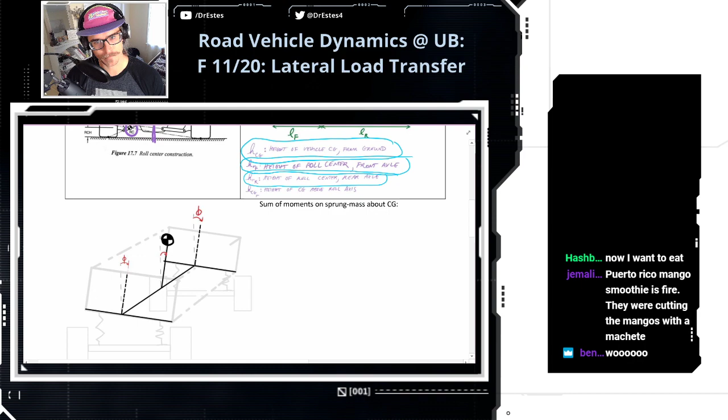Okay, let's recap what's going on here. When you corner in a car, the weight shifts to the outside tires. And when you shift weight, it actually makes the tires at a given axle less grippy in a way. The outside tire, where most of the load goes, gets more grip. But the inside tire that lost normal load lost grip. The net effect is that there's less grip overall at that axle.

So we're trying to reduce the amount of load transfer that happens when racing, because we want the maximum grip. There's a couple things you can do. Number one, you can increase the track width: if you widen the distance between your tires, less load transfer happens. If you bring your CG really low, less load transfer happens. And if you reduce the mass of your car, there's less load to transfer in the first place.

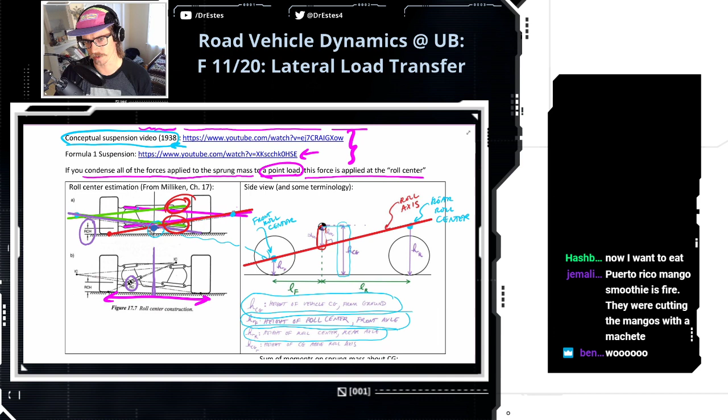And we're going to be using this figure here, this beautiful rendition, to talk about this. So let's just start working on this. We're looking at the car from the front. This is the front, and let's say we're cornering to the driver's right. So actually that'll look to the left for us, but it's to the driver's right. If I'm going to the right, which tire is this? This is the right front tire.

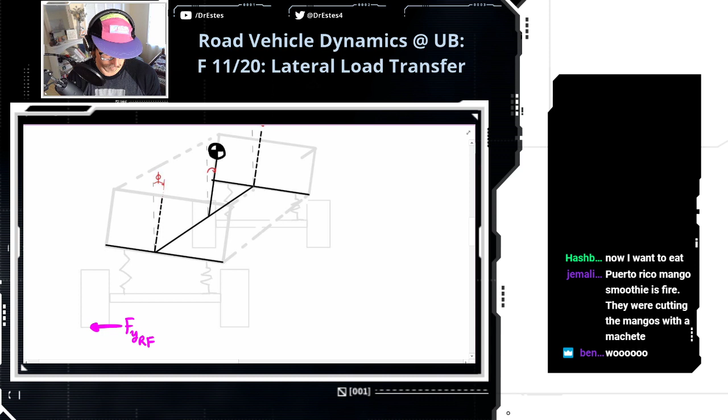So that's the notation I'm going to use. So if I'm cornering right, this is the left front tire. The friction from the road and tire interface creates a force on the tire in that direction. Now, we talked about the roll center earlier. The significance of the roll center is that we have this force generated at the ground, and it's going to transmit through my tire, through the structural elements of the suspension, and eventually transmit a load to your sprung mass. So up here, the mass above the suspension, that's our sprung mass.

Now the significance of the roll center is that theoretically, if I could take the forces from the tires and put them at one point on the sprung mass, it'll happen at the roll center. So I'm going to put Fy at the front. It's going to go right there. That's combining the left front lateral force and the right front lateral force. If we combine it to one point, it's going to be combined at the roll center.

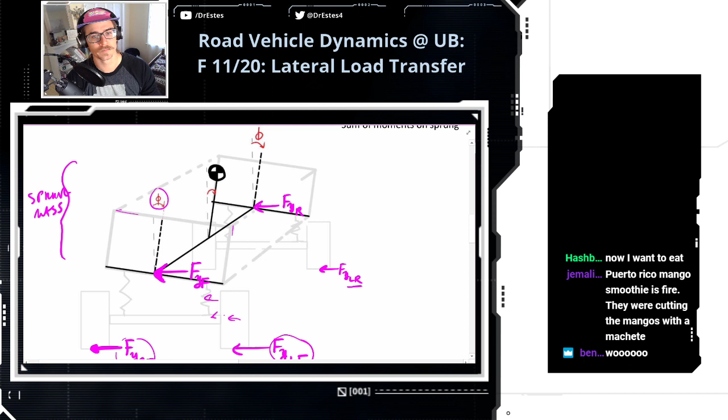So we're cornering to the right. And notice the body of the car is going to roll to the outside tires, an angle phi, which is what we're showing right here. So it makes sense, these outer tires are feeling a little bit more load from that. Okay, so I want to start talking about the suspension springs a little bit. And to do this, I think I want to make some room. Can I zoom in more? I'll just write that a little smaller here.

All right, let's draw a horizontal line that represents before the car rolls. If the chassis didn't roll, it would just be upright like this, right? So this angle phi, that body roll angle, is also going to be in here. So that's what that angle is. And we can think about what the springs looked like before the body rolled. Both of them were just kind of like this. But now that there was roll, this spring over here got compressed that amount. And this spring over here got stretched this amount.

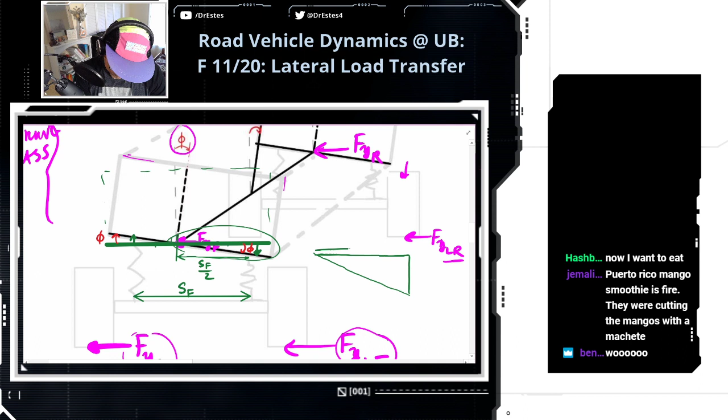So what I want to do, I want to zoom in on this triangle here. And I'll exaggerate this roll angle a little bit. Okay, so this top length from here to here, this is going to be that distance between those suspension springs divided by 2. The angle in here, that's the roll angle of the sprung mass.

And this distance here, I'm going to call it delta Z. And that's the distance that this spring, this is the left front tire, that's the distance that spring was compressed. So what I want to do, I want to find a relationship between delta Z and this roll angle. So we can do that really quick.

So I know that the tangent of this roll angle is equal to the length of the opposite side, delta Z, divided by this adjacent side, which is that distance between the springs divided by 2. Actually, let's just solve for this. Okay, so delta Z is equal to SF over 2 times the tangent of that angle. If you assume that the roll angle is small, then tangent of phi is approximately equal to phi itself.

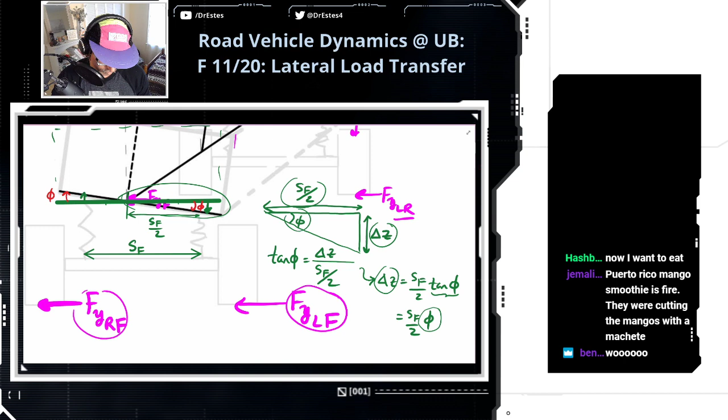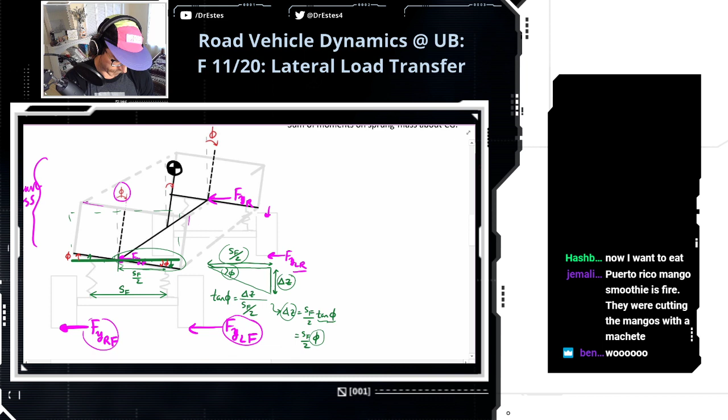Okay, let's see if I'm missing anything here. What I want to do, I want to do a sum of moments acting on the CG. So the forces that are going to produce moments, we have the front lateral tire force acting at the front roll center. We have the rear lateral tire force acting at the rear roll center. But we also have a moment that's produced by these springs.

And so the spring force, let's see. If I compress this spring an amount delta Z, the force from the spring by Hooke's law is going to be the stiffness of the spring, usually we use K, and let's say this is the stiffness of a suspension spring at the front, times delta Z. So this spring, when I roll this way, it's going to produce an upward force on the chassis, which is equal to that stiffness times how much you compress the spring. That's just how a spring works.

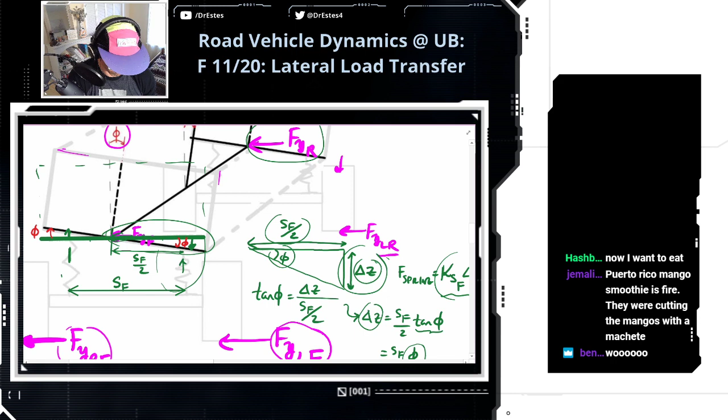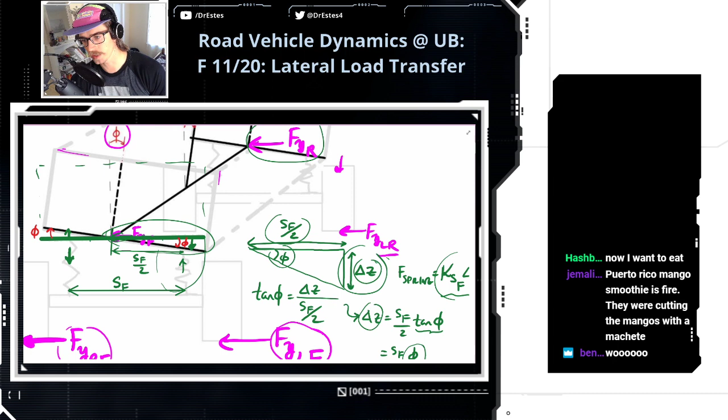Same thing here. Oh, wait. On this side, this spring is getting stretched. And so it's actually going to produce the same magnitude of force, but in the opposite direction. So these springs are trying to resist any rolling. Makes sense. All right. So let's start to do the sum of moments on the sprung mass, or rather, sum of moments about the CG.

Now, there's moments generated in a couple directions. We know there's a moment about the vertical axis, so that's the yaw motion, and when we're doing steady state cornering, that moment should be balanced, and it depends on the proportion of front and rear lateral force. So if those moments are balanced, then we're not spinning out the car. So I'm not interested in that moment right now.

I'm going to talk about a moment about an axis that's parallel with the roll axis. So I'm going to do moments about the CG, and I'm going to be interested in the moments about this axis, because we got this side view up here. So we have the roll axis here, which connects the front and rear roll centers. That's how you define the roll axis. And then I'm making another axis here. So I'm going to sum the moments acting on the CG about this axis.

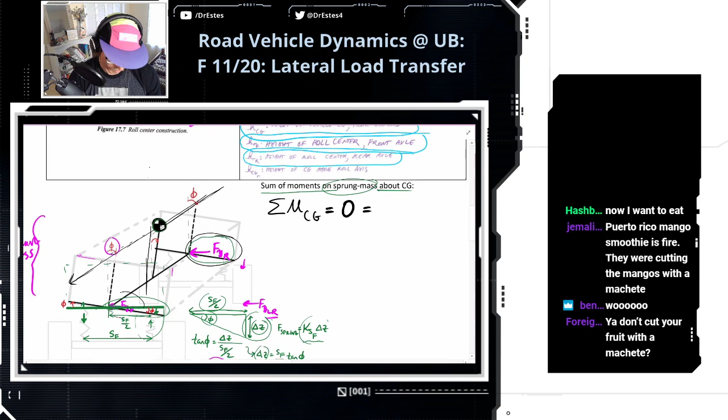Here we go. So let's assume the moments are balanced. We're going to be at steady state cornering. And we have a moment created by, let's see, I think this will be a negative moment. I have the combined lateral force from the front, the combined lateral force from the rear, and it's acting over a distance, the height of the CG above the roll center.

Foreign Wanderer says, you don't cut your fruit with a machete? I don't. I don't want to lose fingers, because I like to play instruments. So I'll just use a kitchen knife.

Okay, so you can see that this lateral force would kind of want to make the CG or the body roll this way. It's like I'm pushing the feet out from under it and it's going to tip over this way. But the suspension springs are going to resist that. Because this spring's pushing up, this spring's pulling down, and they're trying to make a moment that's fighting that.

Yeah, I use a katana instead.

Okay, so now we're going to add the moment that's resisting this moment from the lateral force. So let's first talk about the springs from the front. Maybe I'll use green here because I've been using green for those springs. So I'm going to have plus the spring stiffness at the front times the distance it's compressed. So that's the force from the spring. And then it's acting over a distance SF over 2.

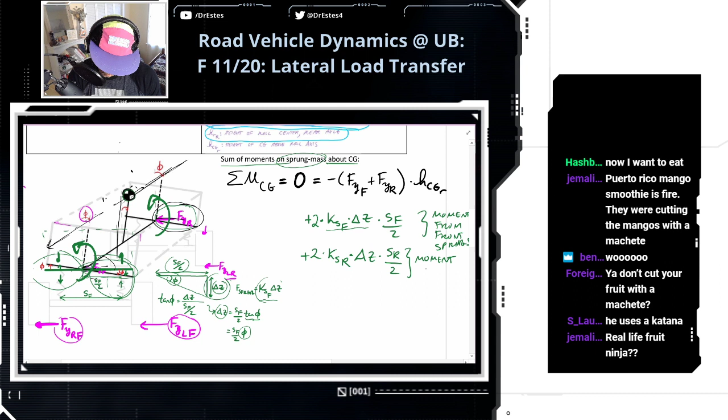Okay, so those are from the front springs. And then the same thing's going to happen at the rear. But potentially, you could have a different suspension stiffness at the rear. And you could have a different distance between their connection points. So this is the moment from the rear springs.

Okay. Now, the thing here that is important is that this deflection of the spring, the compression at the front and the rear, we're assuming it's the same. And that's based on the assumption that the roll angle is the same at the front and the rear. So we're assuming the chassis is rigid. It's rotating about this roll axis. And so that angle is going to be the same at the front and the rear. And because the angle is the same,

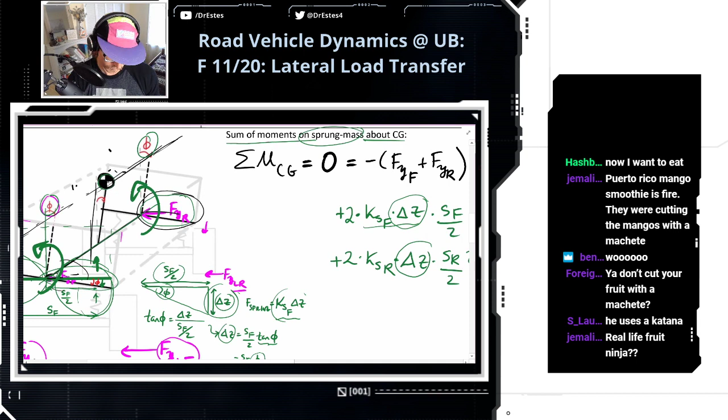this deflection, actually, doesn't the deflection depend on... No, the deflection isn't the same. It depends on how far away the spring is. Okay, so we should do that. The roll angle is the same, but that doesn't mean that the springs are compressed the same. All right, this should be rear. Because it depends on the spring attachment point.

Louis says, why times 2 at the front? Because this term only considers a spring on one side. I keep confusing myself. This is the left front side. So I was looking at the suspension regarding the left front tire, and that produces this term. But the contribution from the right front tire is going to give you the same term. So I'm just multiplying it by 2, so it's getting both sides of the car. Okay. Good.

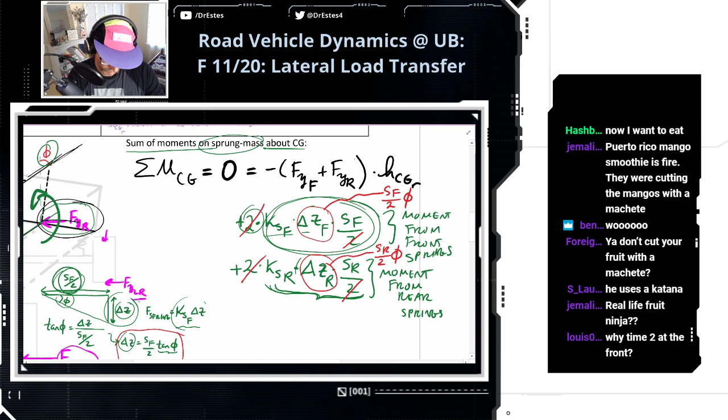Okay. So we'll continue with this. Before we move ahead, let's cancel out these 2's. There we go. And we know that the sum of the lateral forces should be equal to the mass of the car times its lateral acceleration. Okay, good. So here we go. Now we're going to say this is all equal to the negative of the mass times the lateral acceleration times the height of the CG above the roll center.

Cojul says, what's up, Dr. Estes? Just summing some moments, just using Newton's laws, that's all.

Okay. And then we're going to have from the front springs, K springs at the front times SF squared, because I'm going to have SF times SF, times the roll angle divided by 2. So that's the moment from the front springs. Let's add the moment from the rear springs: K spring R, SR squared phi over 2. All right.

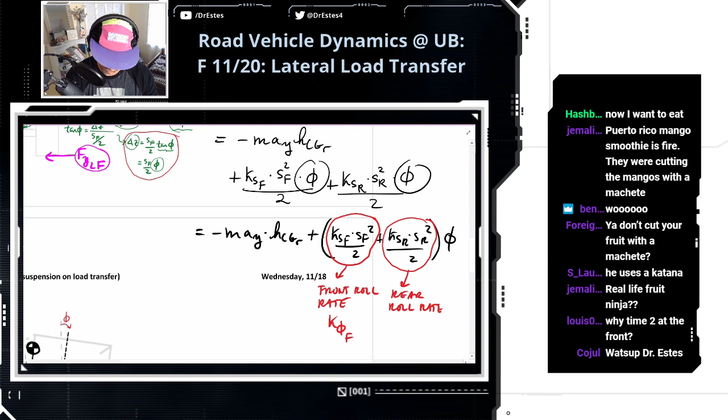Okay, here's the term. This right here is called the front roll rate. And the symbol for it is K phi F at the front. And it's kind of like a torsional spring constant for your front suspension. This one is the rear roll rate, K phi R.

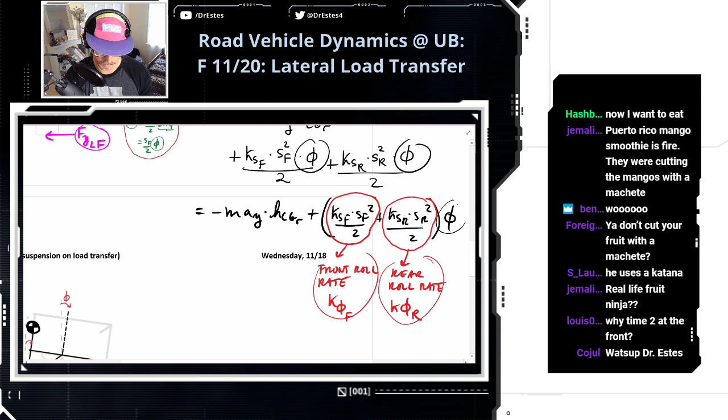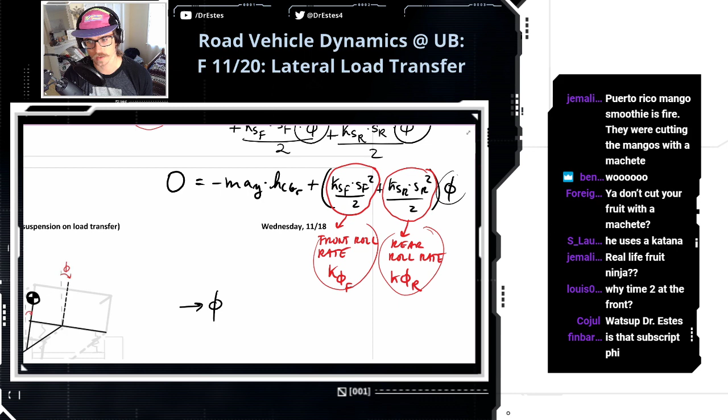All right. So we're going to be talking about tuning these terms. Okay, now I want to solve for this angle phi in terms of all the other stuff, because this is equal to 0 if the moments are balanced. So the roll angle of my car, is that subscript phi? Yes. Yeah, that's right. So I got K sub phi and then just F or R for the front or the rear.

Okay. So I got phi is the mass times the lateral acceleration times the height of the CG above the roll center divided by the sum of my front and rear roll rates. And okay, so this is the roll angle. Now, there's also another term. So if we take the ratio of the roll angle to the lateral acceleration, so if I divide both sides by the lateral acceleration, this is going to give you the amount of roll you get per lateral acceleration.

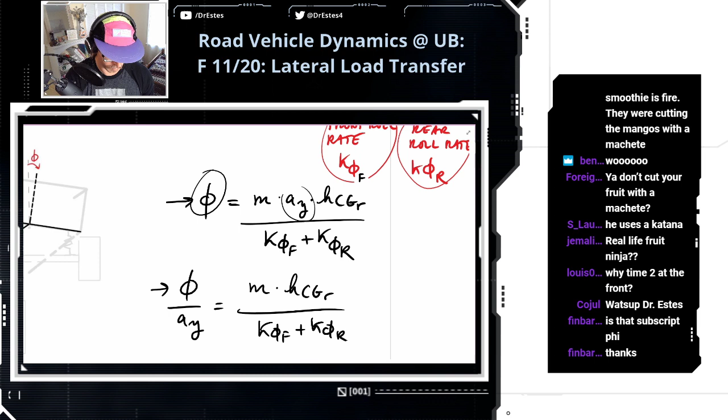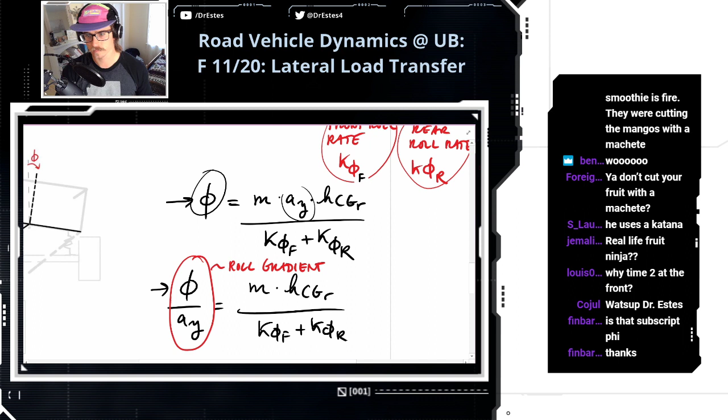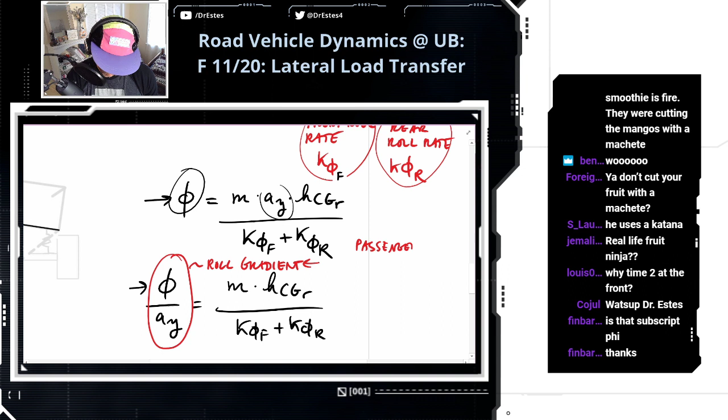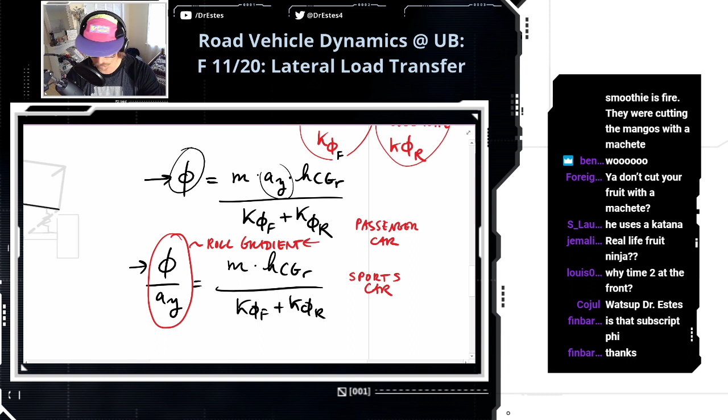And I want to give you some typical values for different cars. So mass times the height of the CG above the roll center over the combination of my front and rear roll rates. This ratio is called your roll gradient. So let's give some typical values here. Let's do a passenger car. Let's do like a sportier car, something like a Mustang, a BMW M4, something like that. And then we're going to do a Formula One. And we're going to give the roll gradient.

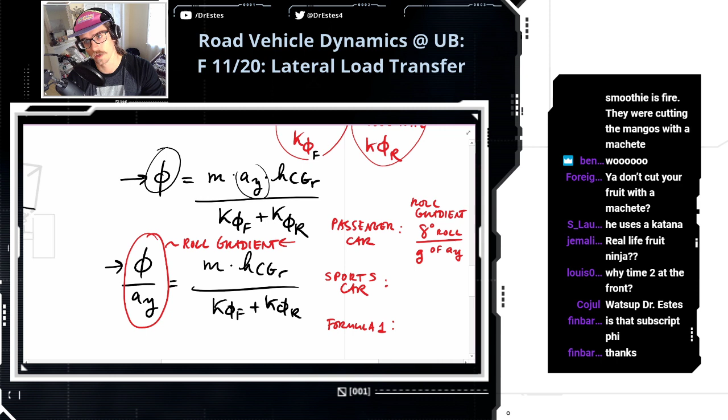So a passenger car, we're talking about like probably 8 degrees of roll per G of lateral acceleration. So probably in your passenger car, if you're pulling a G, probably 8 degrees of roll. Sports car, maybe 3 degrees per G of lateral acceleration. Formula car, more like 1 degree of roll. Can you think of why there's such a big difference here?

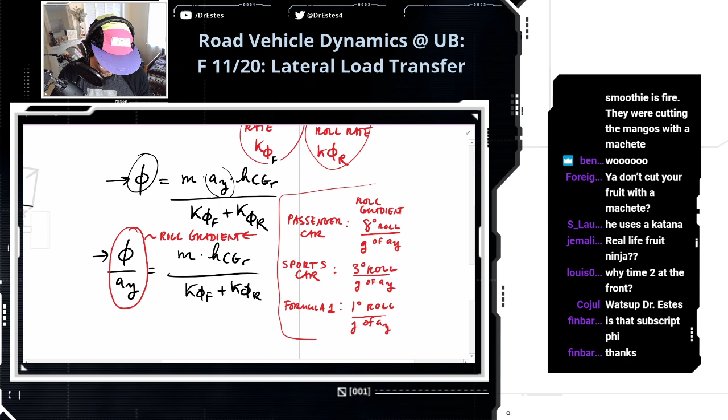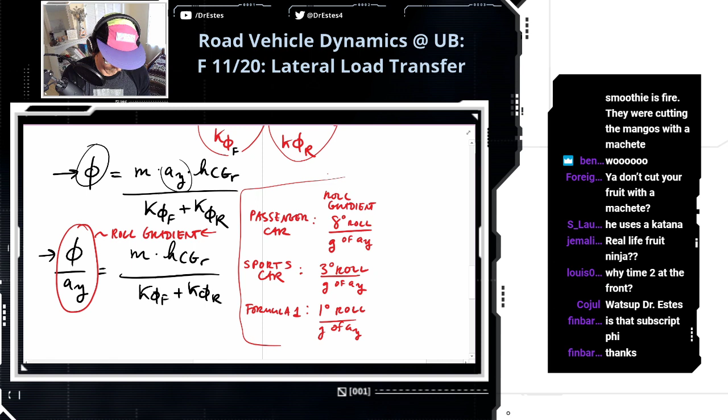Basically, well, one thing that's just kind of funny is the goals of these cars are totally different. Car geometry is so much different in all three of these cases. Yeah, exactly. Pavelo brings up something, yeah, stiffness. The height as well. When you watch a commercial, it's the holiday season, so there's all these commercials about luxury vehicles, and it's just quiet. They're advertising the ride of the luxury vehicle. Ride is kind of referring to if there's a bump in the road, you're not going to feel it. It's going to be just super smooth.

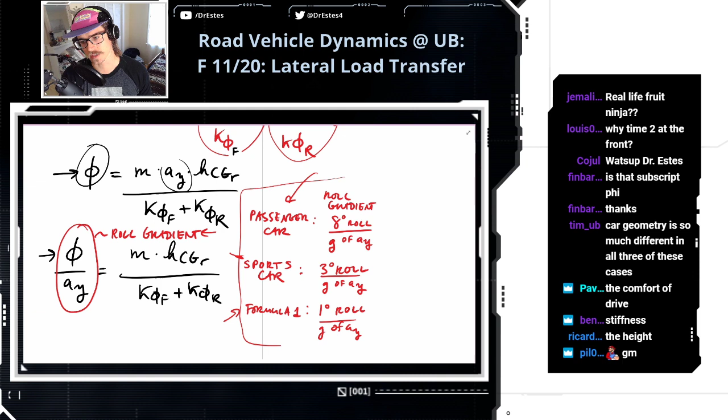And something that contributes to the ride of the vehicle is a little less stiffness, or maybe a lot less stiffness in your suspension. So like a passenger car or a luxury vehicle, these roll rates are going to be smaller. Why? Because the springs are less stiff. Now, once you start talking about a sports car, a formula car, the goal is not to improve rider comfort. The goal is to get from A to B as fast as possible. And so a stiffer roll rate is better for load transfer. Yeah. Hardly any roll.

So, using these typical values, this is one way that we will be able to get a basic idea of how stiff the suspension is in a car. So let's do a quick example. We'll finish with this today. We still haven't gotten to how you can tune front and rear load transfer, but it's going to come down to this roll angle. So we needed an expression for how much body roll we're going to get. So, okay, let's do a quick example.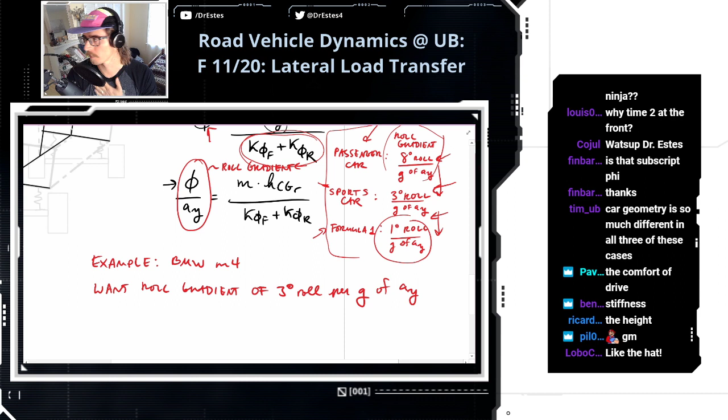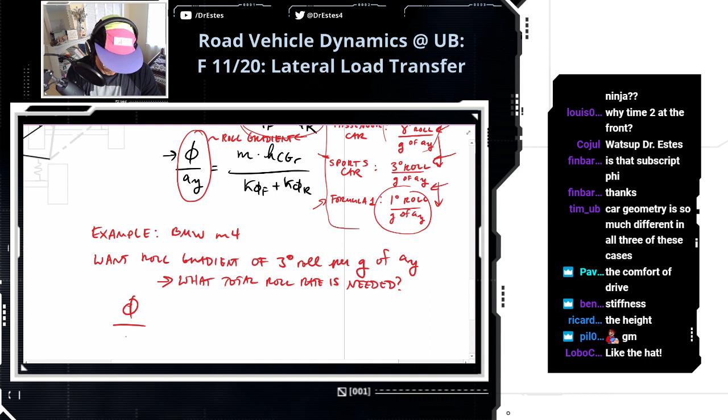Let's say we got a BMW M4. What if we want a roll gradient of 3 degrees of roll per G of lateral acceleration? So what total roll rate do I need? All right. So we're going to have phi over a_y. We know it's equal to the mass of the car. Wait, I'm just using this formula up here. I don't need to rewrite the whole formula.

Okay. So we're going to have 1572 kilograms times 1/3 of a meter. That's going to be our height of our CG above our roll center. The M4 has a pretty low roll axis. And then we have our total roll rate down here. Here we go. Brilliant.

Okay, and so let's talk about this. This is going to be 3 degrees, but let's convert it to radians. So pi radians per 180 degrees per G, and a G is 9.81 meters per second squared. So our total roll rate here is going to be this number divided by that number. 97,193 Newton meters of torque per radian of body roll. Or let's do this in Newton meters per degree.

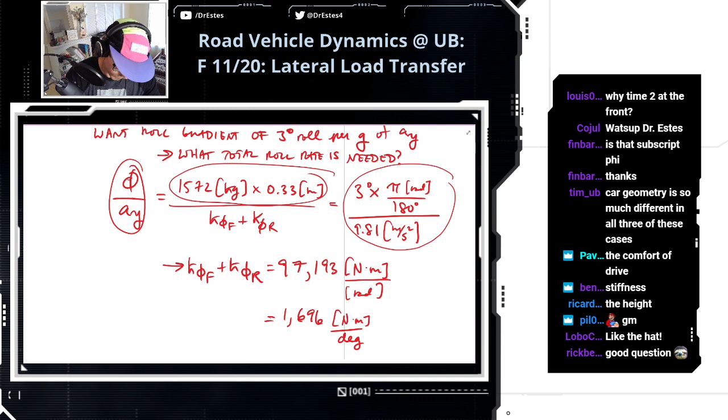Radian is necessary. Well, no, I guess it isn't. I guess it isn't because no, it isn't. I don't know why I said it is. I mean, a lot of the formulas we use, it's cleaner if we do radians, but now that I'm looking at it, we could have just done it in degrees. No, you're absolutely right. It's just a matter of habit.

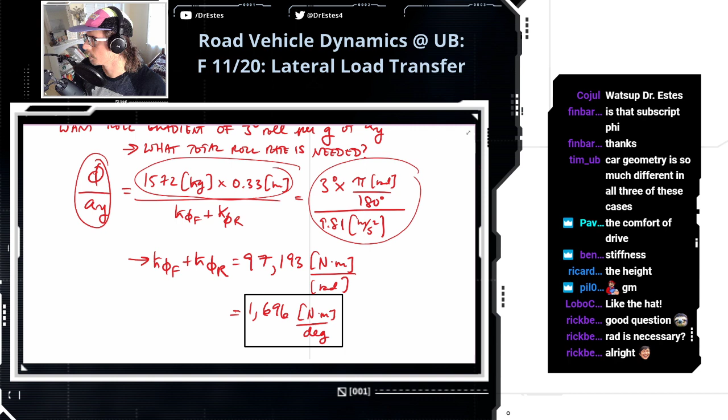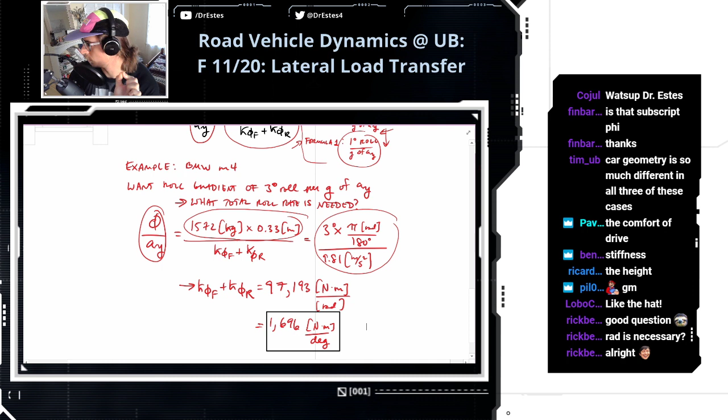Shoot. Okay, thinking about the time here. Okay, we'll come back to this on Monday, okay? Because what we're going to do next is, assuming we know the roll, we're going to look at the moments acting on the front axle.

And so when we assume that there's some roll happening here, then we're going to get some force on the front axle. Like in this case, I'm compressing this spring. So this load, it's going to pull down. I'm pulling this spring. That's going to create a load going in this direction on the axle. And then I have my normal loads on the tires, so from the pavement onto the tire. So we have these 4 forces that are acting on the axle.

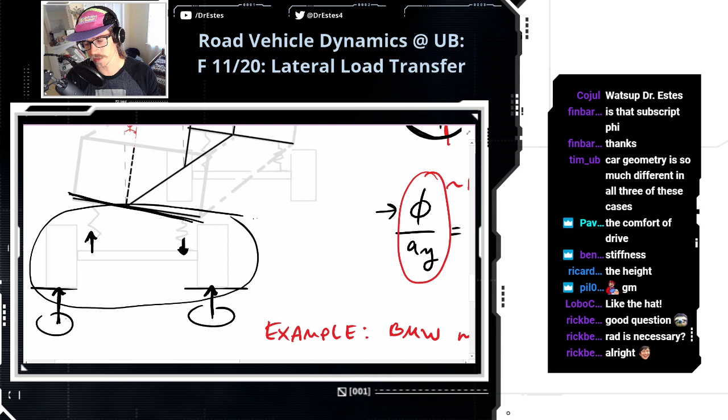And then assuming that the moments are balanced, that we're not lifting a tire off the ground, then we're going to be able to solve for the normal loads here and here. And we can do the same thing at the rear axle. And once we start doing this, looking at the moments on each individual axle, we're going to get expressions for the load transfer at each axle, and it'll depend on the relative roll rate at the front and the rear, and it's going to depend on the relative roll center height at the front and the rear.

So it's really cool because it's going to unpack 3 or 4 things that you can do at each axle to dial in the load transfer at that axle. So that's what we'll do on Monday. And then you're going to have Thanksgiving break.

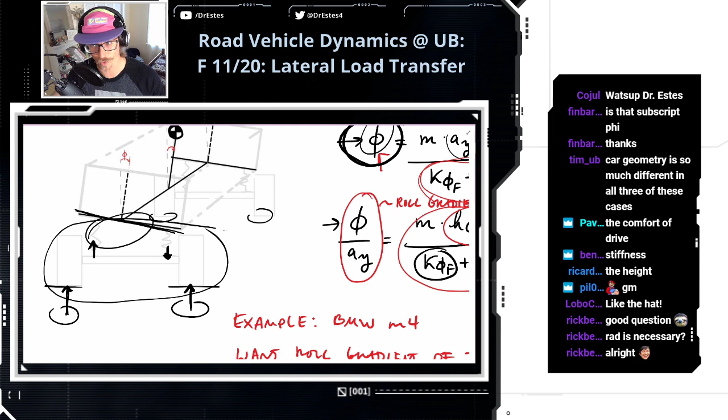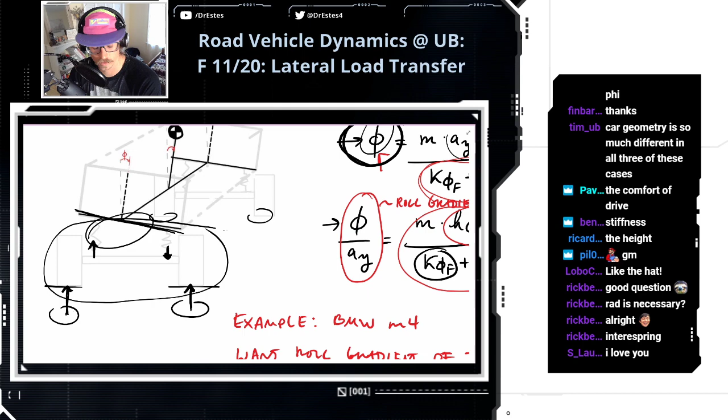Interespring. Nicely done. Nicely done there. I love you. I mean, I love you. I love you too, I guess. The world needs more love. Whew. I know our notes are a little bit all over the place today. We'll see if I have time to get back in here, clean it up a little bit. Was talking to this dirty punter. Oh, okay. Got you. Yeah, that was a very nice pun by Rick. Well done. Very well done.

Jenna says, I am so ready for break. Yeah, I hear you. This is a well-timed break. Everybody's going to get some well-deserved rest. And then when we come back, we just have 2 weeks of classes.

Ricardo says, stiffer spring, less degrees of roll per G of AY. Yes. Stiffer springs mean you're going to get less roll per G of lateral acceleration. That's exactly correct. Yes. Absolutely.

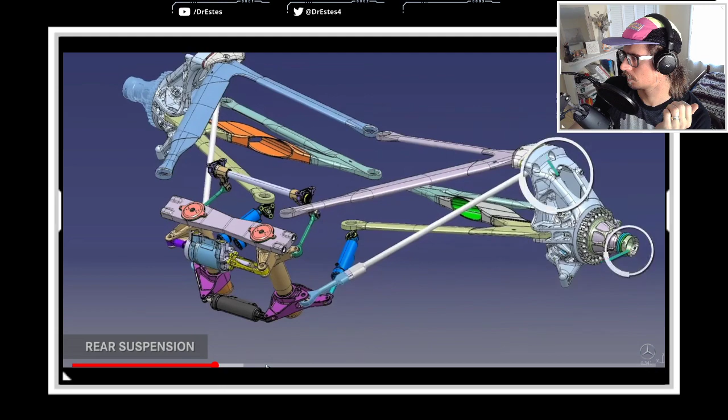The suspension, outboard suspension, which is the upright, the wheel, talking about balance. The reason is that these 4 tyres behave differently every part of the track, every corner of the track. And what we want to do is to control the relative amount of grip of those 4 tyres as the driver goes through the different phases of the corner and the circuit. What the suspension allows us to do is to change minutely the amount of grip that those 4 tyres generate at any one point on the track. And the way we do that is by adjusting.

By the way, I saw there's a job posting or multiple job postings at Mercedes F1. Just saying.

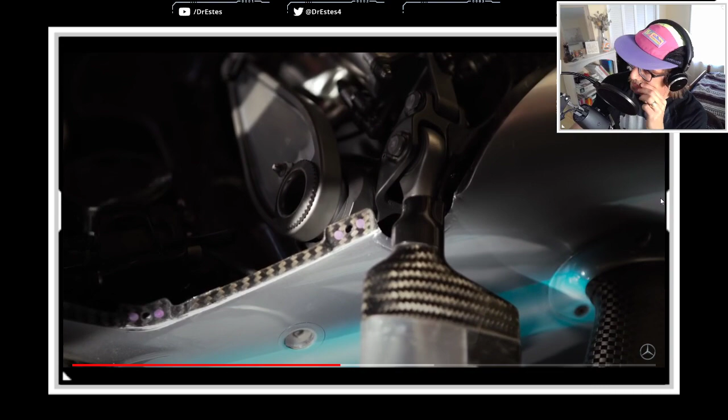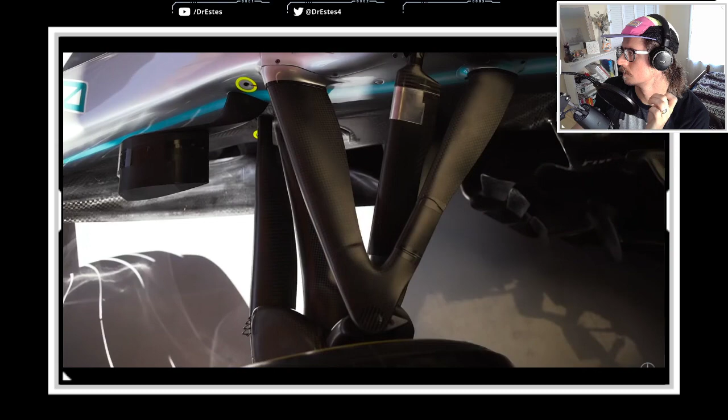The inboard settings of the suspension by adjusting the damping and adjusting what we call the mechanical balance. That's because with that adjustment, we control the change of grip from the rear axle to the front axle. And that depends on the car speed and the track conditions. When we're running the car on the track, we make sure that we look at the suspension loads that we're generating. Sometimes we take that from sensors on the inboard suspension, and sometimes from sensors built into the suspension itself. And it's very critical for us to understand the real loads the suspension sees. So the maximum loads that we're designing the suspension for are based on simulation and on previous year's experience, and also a collection of unusual.

Yeah, I think they're hiring a couple simulation engineers.

I forget the others. Loads that we've recorded over the years in unusual conditions: spinning the car, going backwards over a curb, hitting the brakes while the car's in the air and landing. And these are all critical additional load cases that have to be dealt with in the suspension design and testing. The suspension systems on the road car provide...

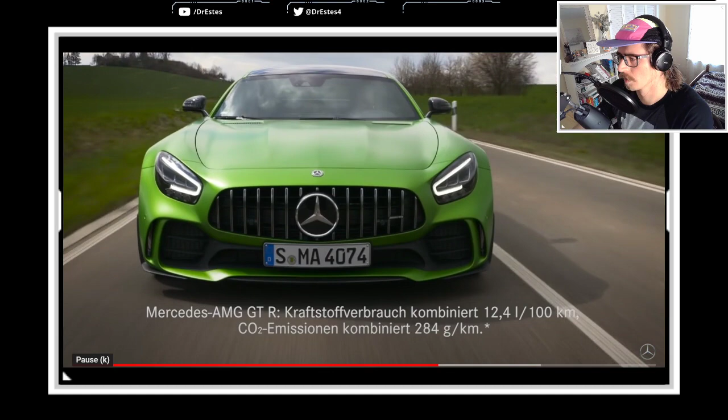Lewis says, Dr. Estes, if you want to try mango shaved ice again, make sure not to go to Taiwan in winter. They're using frozen and defrozen mango. Oh, no bueno. The mango at summer is hand-cut mango, just an insight. Oh, thank you very much. I was there in summer, by the way.

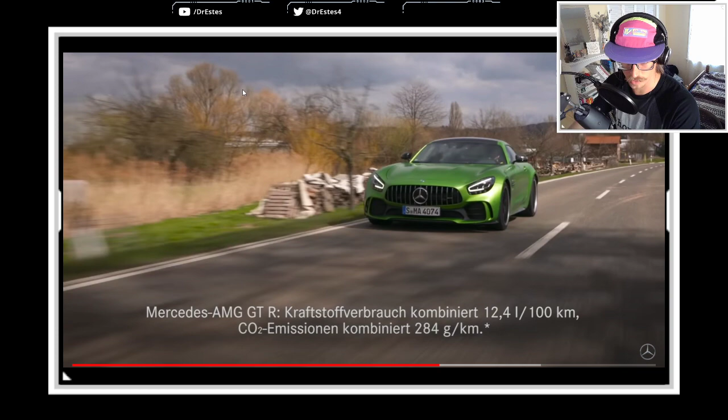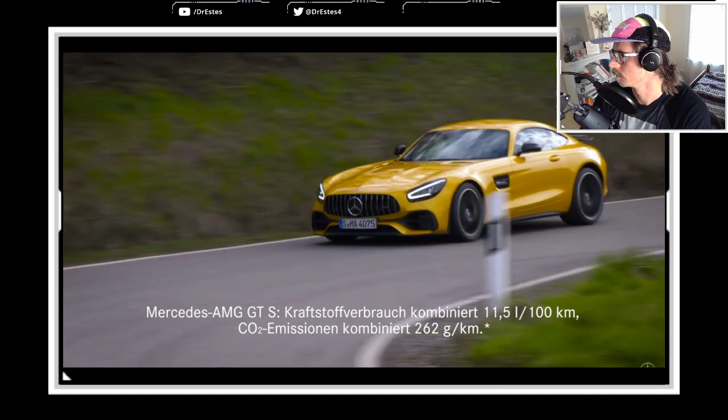Two functions. We call those ride and handling. And ride is about dealing with the surface of the road. Undulations, bumps, curves, changes in camber, ensuring that the grip is spread correctly between the four tyres. The handling is about dealing with the dynamics of the car, how the car behaves under braking, how it changes direction, how it does what the driver wants to do.

Now, a Formula One car has got the same demands of ride and handling, dealing with lumps and bumps, curbs in the track, dealing with more aggressive dynamics of corner entry, braking, steering, acceleration. But the Formula One suspension has a third function, which we'll call platform control. Because Formula One cars generate enormous vertical forces from their aerodynamics, the suspension has to deal with literally tons of extra load on the car at high speed. And we have to make sure that the position of the car relative to the road is well controlled, because this has a very important effect on the aerodynamic performance of the car.

Yeah, I think what he's saying there, that platform control, where the orientation of the formula car relative to the road surface is really important for aero. And I think a stiff suspension helps with that as well.

Cars and Formula One cars, very similar. They both have ride and both have handling control. The difference is with the Formula One car that it needs the platform control as well because of its dominant aerodynamic effects. We've been working with Daimler, in particular their ride and handling group, for many years, developing our tools for developing suspension systems. In the early days, we had Daimler engineers working directly with us, and as we've evolved our relationship, we've been developing the models, the tools that allow us to design.

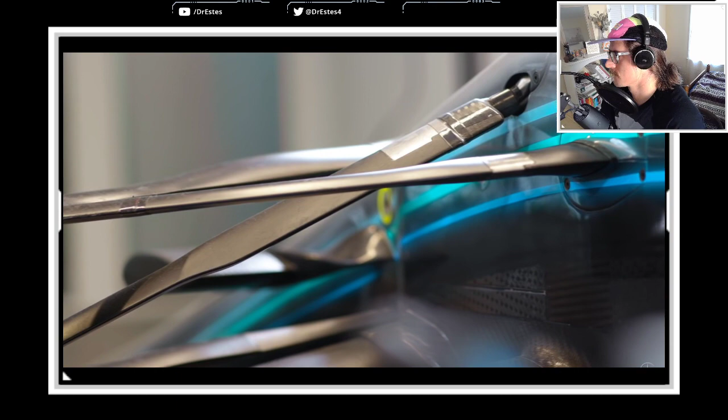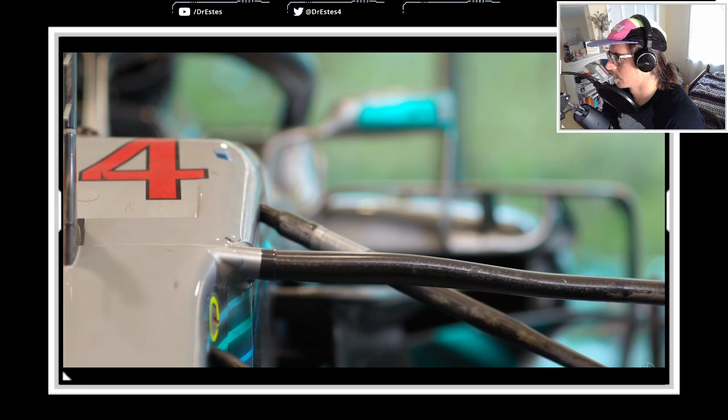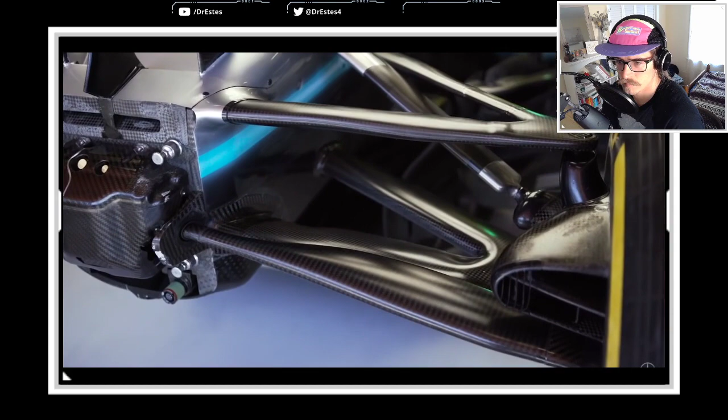And the interesting thing is that although these components look very different, the fundamental physics is very similar. And we've been able to share lots of techniques in designing and analysing these complex systems, particularly the complex hydraulic components of the suspension. And some of these components on the road cars now share very much the same design philosophy as the Formula One components. So the suspension is just one of the many systems that link the Formula One car to the road car and show the bidirectional link between Daimler and Mercedes-Benz Formula One.

Wow, wow, wow. Yeah, where's this? Mercedes F1 careers. Technical roles. View the vacancies. Electronics inspector, performance and simulation engineer. Simulator operator, simulation and modeling engineer. What's the difference?

To identify and develop solutions for performance limitations of the customer car, resulting in delivery of lap time improvements. Isn't that kind of funny? It's like, what's your delivery? A time improvement. Develop simulation and modeling tools.

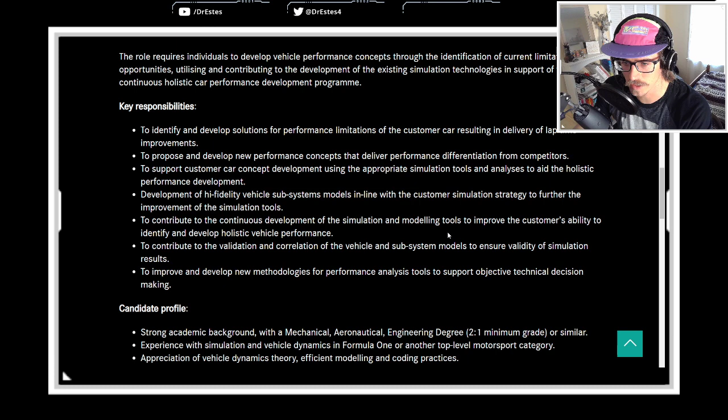Everyone should check out BTS's new song music video. It's called Life Goes On. Put the captions on to see the lyrics in English. Just saying. I hear you. I hear you.

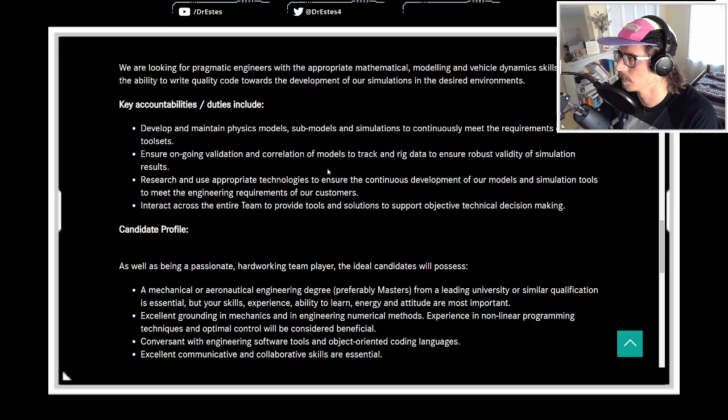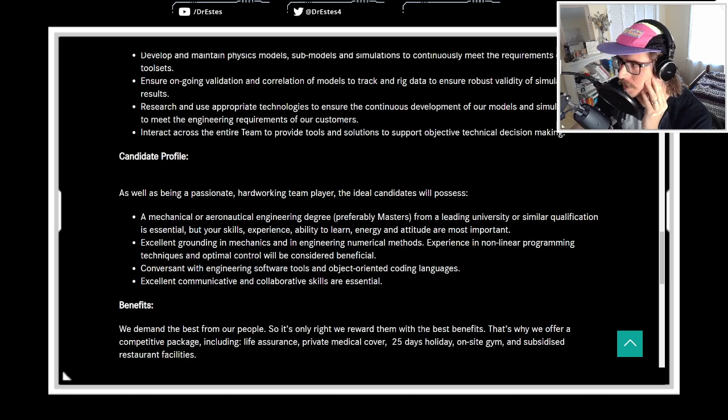Uh-oh. Experiencing using MATLAB. What is this one? On-site gym, everybody. Jesse Pinkman. This would be really sweet. What is a racing? Oh, they don't have any openings for racing roles. Operations roles? What is this? Support engineer. Oh, IT. Is this a US location or Germany? I have a feeling they're in Germany. They say.

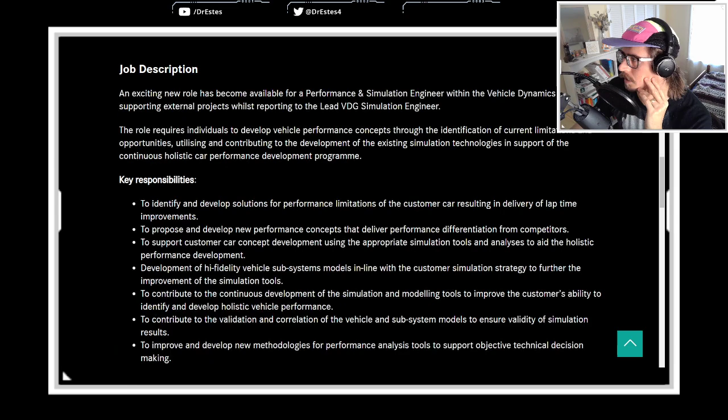I mean, the fact that it's like this on-site gym, I feel like it's the facility that was in that YouTube video. Who knows? This stuff is out there. It's probably Germany then. All right, time to get your passport. Yep. Exactly. Exactly. Bags are packed. See you in Germany. Yeah, that'd be sweet. It'd be really cool to be a part of. I mean, it seems like a very high pressure environment, but very, very cool.

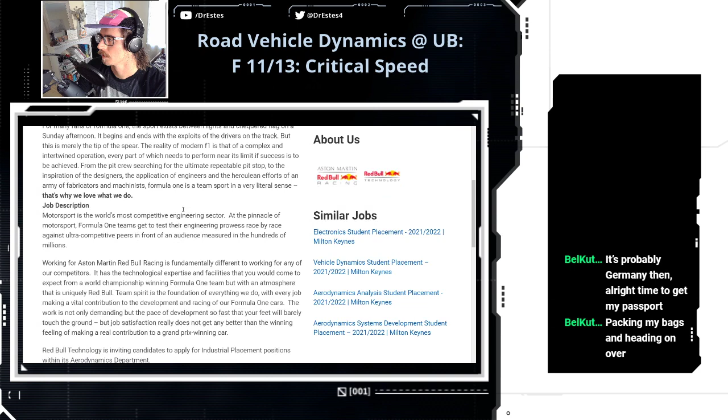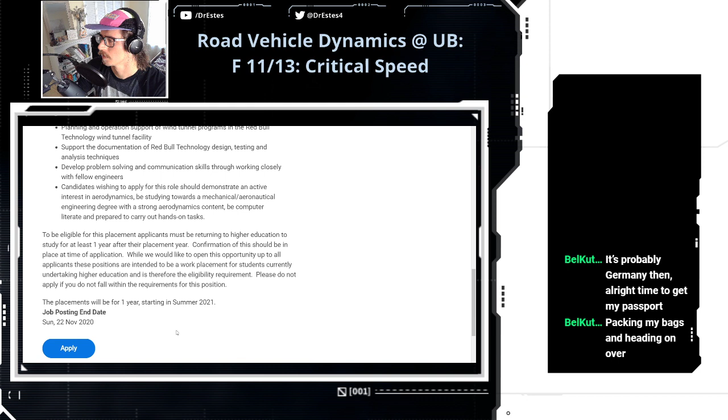Whoa, look at this. So this is Red Bull Racing. They have some student thing. For 2021-2022, posted 3 days ago. What do you do? Wind tunnel, CFD, aerodynamic design, wind tunnel programs. Starting in summer 2021. Wait, what are the requirements? You must be returning to higher education to study for at least 1 year after the placement.